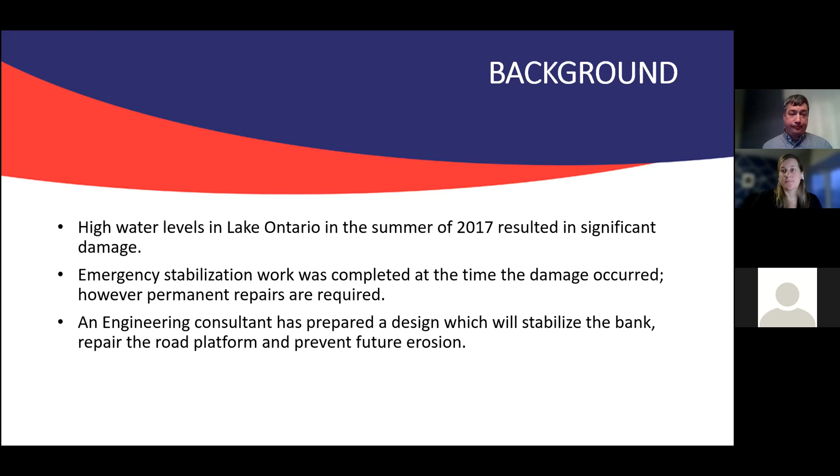So project scope: the scope of the project is to repair flood damage and the road along sections of South Shore, Front, Second Concession, and Third Concession roads. No other road upgrades are planned as part of this project.

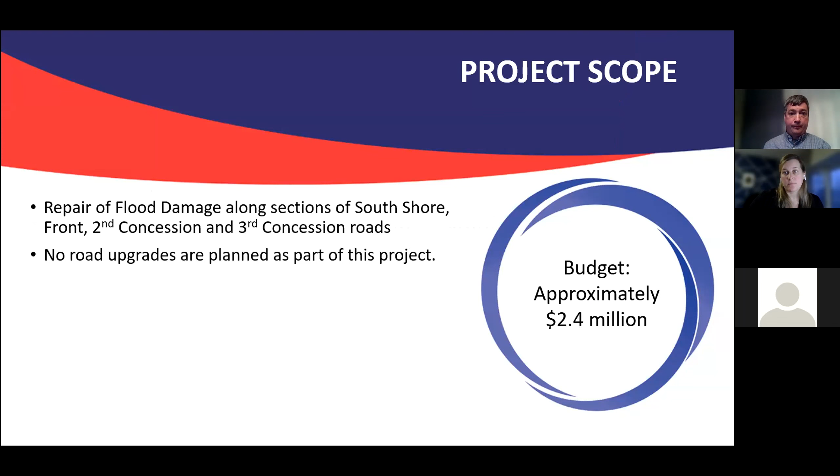I didn't put the drawings into the presentation because it'd be very hard for people to see within a PowerPoint presentation. However, they can be viewed on the township website projects page, and the location's on the screen there. Once you're in the projects page, if you click on the AI flood damage project and then follow the link at the bottom to the project page, you can see the drawings by project area.

Someone's asked the question about blackout periods. We're still working with MNRF to finalize our permits for in-water work. So areas where the work involves in-water work, depending on what fish species may be there, there are restrictions on when the work can be done. It might be June to October for that particular area, something like that. That'll be determined in conjunction with the Ministry of Natural Resources, as well as the biologist from the engineering consultant that we hired.

We'll just work around those windows and try and plan the work for areas where they're not impacted. If there are areas where there's a blackout period, then we'll just have to wait. There'll also be obviously some seasonal shutdowns. This is a fairly large project, so depending on how late into the winter, the project may have to be paused over winter.

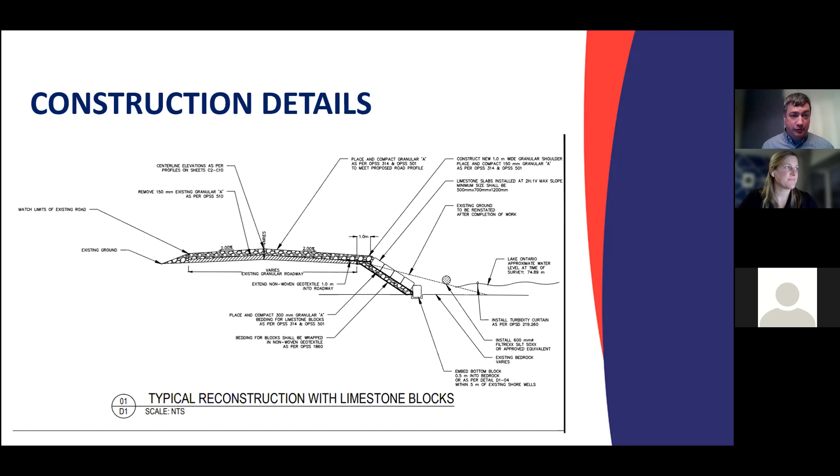Okay, so construction details we've kind of gone through. Front road we talked about. Second concession, I believe, is where I somewhat left off. So that's the project location on second concession.

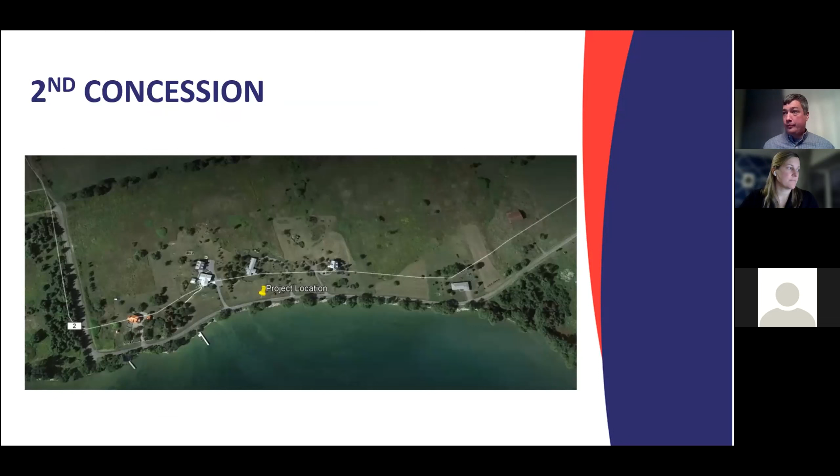So third concession, there's one section of work planned, and it runs from Sand Beach Park west for 820 meters, just before the Emerald 40 foot. If you look on the slide, you can see where the road starts to move away from the shoreline, and that's obviously where we don't need to protect the shoreline anymore. So that's the natural stopping point, and it's shown in a bit more detail on the actual engineering drawings.

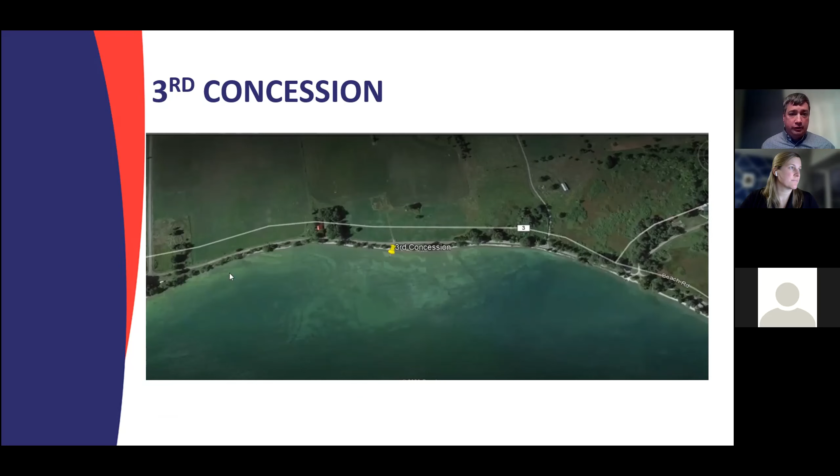So South Shore Road, there are 3 sections of work planned. The first section is between 4615 and 4895. Those who are familiar with the South Shore Road, there's a small little bay, not very long - I think it's a couple hundred meters - but the lake's right at the road. It's pretty obvious to everybody who travels the road which section that is. So there's a small section there.

And then between 3600 and 3950, that's the section of South Shore Road, again where basically the road comes out to the lake, does a bit of a curve, and then starts following the lake. And then there's a provisional section that will be included in the contract provisionally, and whether we move forward will depend on a number of factors. That'll be from 3600 to just before 3000 South Shore Road, so it kind of continues on until just before - there's some steel guide rail that's been installed a few years ago. Potentially it could go as far as there depending on what happens.

So what you can expect during construction - it's construction, so unfortunately there will be some delays and some inconvenience. That's unfortunately the nature of construction.

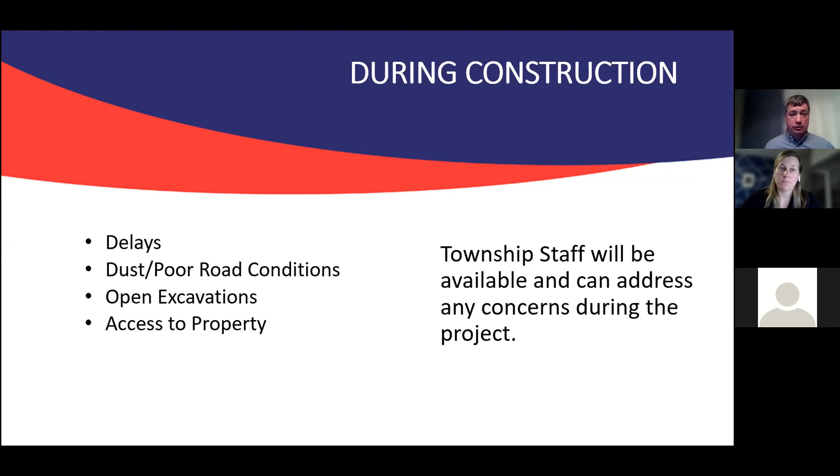Trees - the question was asked earlier. There's no plan to do anything with trees on the inland side of the road. However, on the lake side, to do the work, it's anticipated that most of the trees will have to be removed. In general, if the tree roots are damaged and it's the opinion of township staff that the tree won't survive, we will remove the tree just to make sure it doesn't create a safety hazard.

Most areas it won't be an issue, but I know there are a few locations where there are trees on the lake side of the road, and unfortunately there's a good chance that they will have to be removed as part of the project.

Shore wells - we talked about a little bit, but they will be protected during construction. There is a detail on the drawings online, but essentially they're protected with geotextile cloth and blocks, and they'll be marked to make sure. That includes the shore well itself, and any associated piping and wiring from the shore well to your property.

Once the contract's awarded and we get a little closer to construction, we will reach out to property owners to make sure we know the location of your shore well, where your pipes are, and where the wiring is for it, because we want to make sure we don't dig something up that is important.

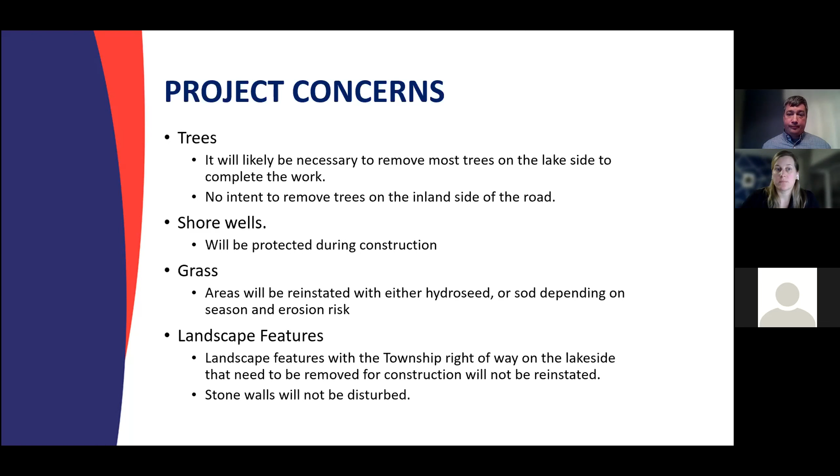An environmental impact study—that's the word I was looking for—was completed as part of the design process. We retained a consultant, they completed that, and the recommendations of that report will be followed by the township and included in the construction contract as a requirement of the contractor during construction.

In addition, due to the in-water work necessary for the project, the township has applied for permits from both CRCA, the Cataraqui Region Conservation Authority, and the Ministry of Natural Resources and Forestry. All requirements of these permits will be included in the tender for the project and obviously followed by the township.

Site access agreements: we're aware there are some inconsistencies or questions with respect to ownership of property outside the traveled portion of the road in certain areas where work is required for the project. A site access agreement authorizing township staff to complete flood damage repair work on property outside the traveled portion of the road, without prejudice to the right of either party to dispute the ownership of any portion of the shore of Lake Ontario in the future, has been mailed to impacted property owners.

We did have a legal survey done a few years ago as part of the design process for this, and I believe I have correctly identified the areas where our work may impact disputed property, or property that's clearly not ours.

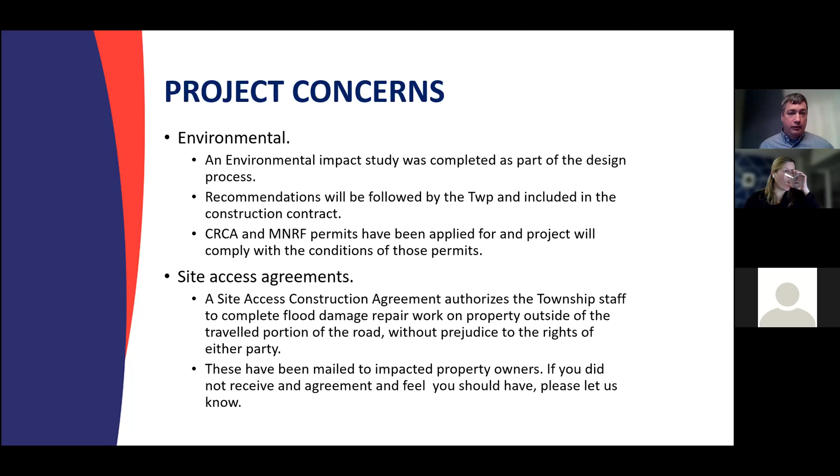And that's it for the presentation. So I'll get back to the questions and just make sure that we've answered them all, or if there's more, we can work our way through them.